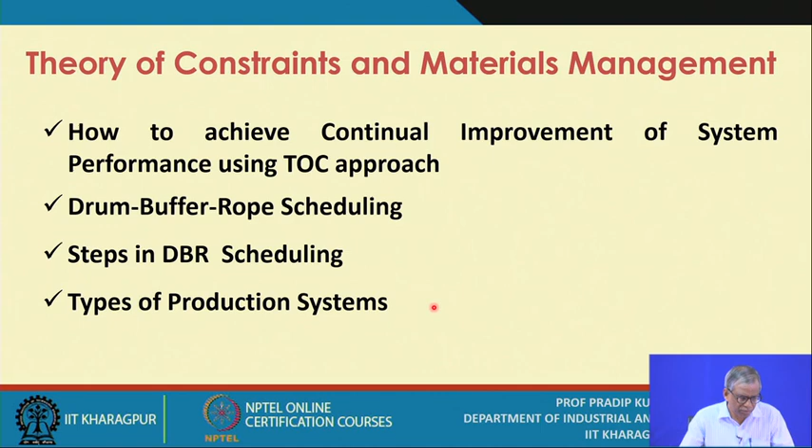And towards the end, we will be referring to different types of production systems. When you try to apply the TOC logic or TOC approach, you need to classify the production systems in a particular way. So, based on this classification approach, what are the types of production systems you come across, and for each type of production system, how do you implement and develop the TOC approach. So, all these 4 issues we are going to discuss now.

Now, the first issue is how to achieve continual improvement of system performance using the TOC approach. Here it is explained with a flow chart in a closed loop. There are several steps, and you have to follow these steps in a systematic manner, and you have to define all sorts of variables, parameters, and outputs at each of these steps involved.

The first one is identification of the constraints. Okay, so that is your first step. The starting point is, obviously, you start with the internal constraints, and many a time the internal constraints are referred to as the bottlenecks. It creates bottlenecks. So you start with identifying constraints, and the constraints are related to the resources, and based on these constraints you need to identify the capacity constraint resources. So this is the first step, and what approach you follow for identification of the constraints.

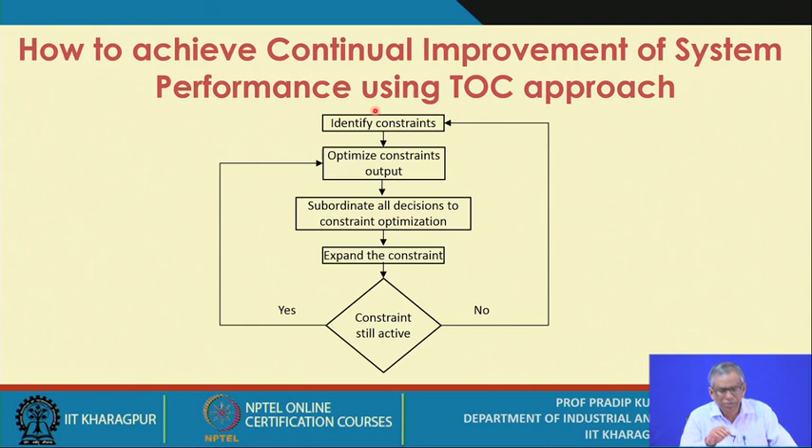So this is the flow chart, and with this approach it is expected that you will go for continual improvement of the system performance. You can set different targets at different points in time, and check whether you are achieving those targets or goals or not. So this is the general approach. In a given situation, you have to apply this generic approach to a particular case. What are those specific constraints? How many constraints have you been dealing with for the last couple of years? You will have that sort of information, and there must be specificity in your whole approach. So this is the first step you do.

Now, by this time you have come to know what the TOC approach is, and how you get optimized system performance by applying the TOC approach. It is a continual improvement philosophy, mainly applicable for repetitive manufacturing.

And what is most important is that the flow of materials within the production system or the manufacturing system should be very smooth, and you must have sufficient control on this flow. That means even if this flow of materials is disturbed, you must know what the possible reasons are, and you must be very responsive, and as quickly as possible you must be able to take the corrective measures.

So essentially it talks about scheduling, and this scheduling, the TOC based scheduling, is many a time referred to as drum buffer rope scheduling. So please note down this name, drum buffer rope scheduling, or in short DBR scheduling. For the working of the TOC approach, you already know the flow chart. If you look at this flow chart, which we have already explained, you will come to know the working of the TOC approach in specific terms.

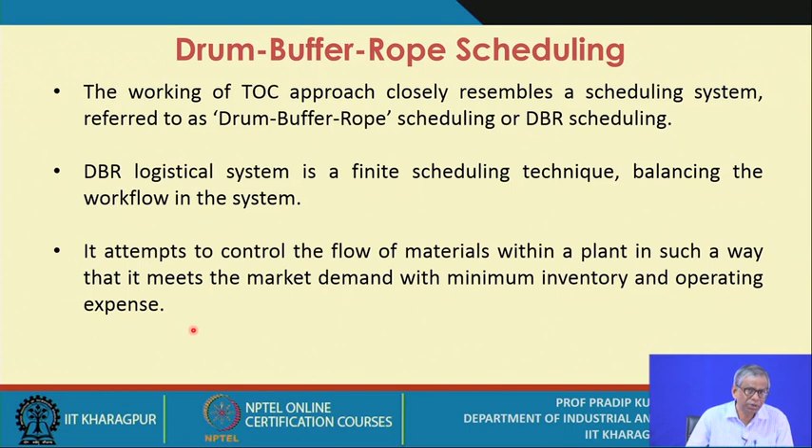It identifies all types of constraints related to three aspects: processing, resources and marketing. Marketing talks about demand generation, and that's why you must know the constraints related to marketing. Then you have been using several kinds of resources. We have already defined what a resource is. Related to a particular resource, you should be aware of what sort of constraints you are facing; we have already mentioned a few examples. And similarly, while processing a particular product or component at a particular resource, what sort of constraints you may be facing. So this list of constraints you must have with you.

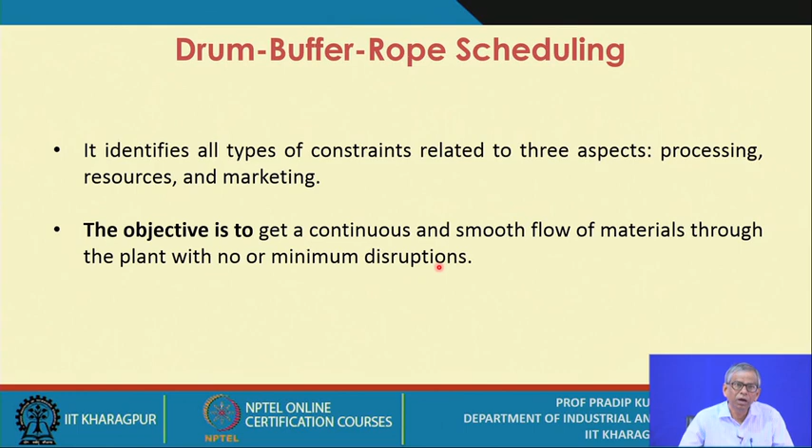So the first step in developing such a scheduling approach is to get the data related to the types of constraints at the processing stage, the resource stage, and the marketing stage. The objective is to get a continuous and smooth flow of materials through the plant with no or minimum disruptions. And even if there is a disruption, there could be certain unforeseen developments causing disturbances; if there are disruptions in the flow, as quickly as possible you must be able to identify the causes and remove them so that you get back your original system and the previous flow rate.

Now DBR scheduling is also a systematic approach. So let me tell you the steps involved. Essentially there are three interrelated steps: step 1, step 2 and step 3. Now let me tell you what you are supposed to do in each of these steps.

In step 1, you need to develop a master production schedule, or MPS, matching with the capacity constrained resources, or CCRs. We have already defined CCRs, and we have also mentioned that the entire TOC approach starts with the identification of CCRs. So this is your first exercise. Assuming that the CCRs are identified, you develop the master production schedule in such a way that the MPS matches with the CCRs.

So this is very, very important. That means your base is CCR, and based on the CCRs, the requirements, you go for developing the master production schedule. When we discussed the MRP, we mentioned the MPS, and that is one of the inputs of the MRP system you are already aware of.

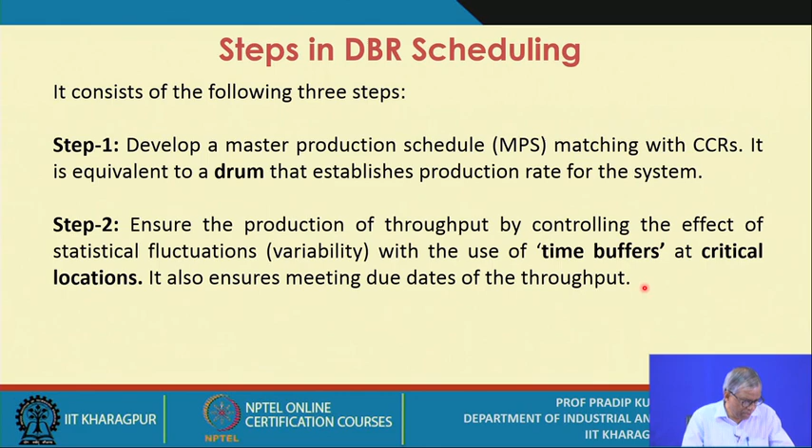So many a time you apply the priority rules for the jobs of scheduling, and in this case particularly one priority rule you must be able to satisfy, or you must use, and that priority rule is actually meeting the due dates, or expected due dates, of the throughput. Once this is done, that means at the first step the drum, at the second step creating the time buffers at the critical locations of the production system, next you move to step 3. That means when you reach step 3, the variability is under control.

You can use the time buffers to control the flow, and you are in a position to produce the throughput, and you are also in a position to meet the due dates. Is it okay? So that means once you are successful in implementing step 1 and step 2, the entire production system is more or less under your control. Then you move to step 3.

Tie the production rate for the CCRs to each resource by using time-phased logistical ropes. That means with the rope, you try to control the rotation of the drum. So this is referred to as the ropes, and the ropes synchronize all non-CCRs to help timely release of required materials with required quantity at required time into the system.

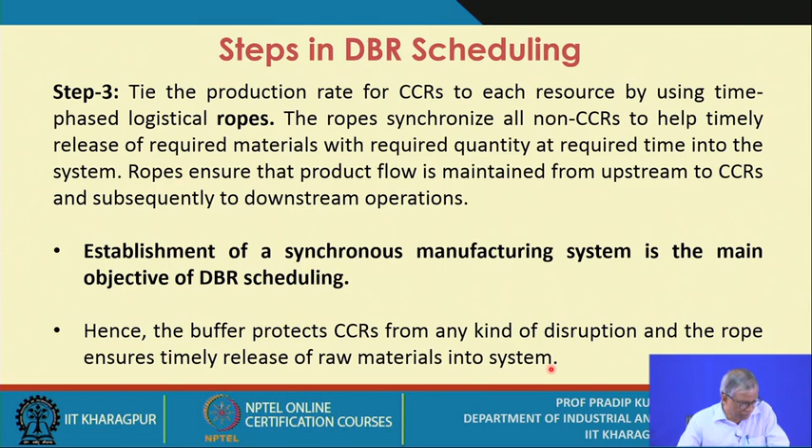Quantity is definitely one aspect, and the second most important aspect is the timing. Otherwise, the smooth flow of materials you cannot maintain. And what is important is the rope ensures timely release of raw materials into the systems. Is it okay? So this is also very, very important, both quantity and timing.

Now, in this context, identification of scheduled release points out of many possible release points in the production system is a critical issue. So, just make a note of this term, scheduled release points. When you represent a particular production system with a diagram where the interrelationships between different stages are highlighted, the first thing you need to do for application of DBR scheduling is identify the scheduled release points.

As only the scheduled release points are tightly controlled, there may not be any need for close control of other points. There may be n number of release points, but out of these, which ones are the scheduled or critical release points, you need to identify them only. There are 4 categories of scheduled release points. At this point in time, you must know how to categorize these release points.

First one is the raw materials release points. This is very, very critical, in fact. Then the CCRs; all the CCRs you need to identify, and all these CCRs are critical release points. Then the assembly points, because assembly points are very critical in the sense that you must ensure the supply of the required quantity of materials as well as the timely release of such materials to the assembly points.

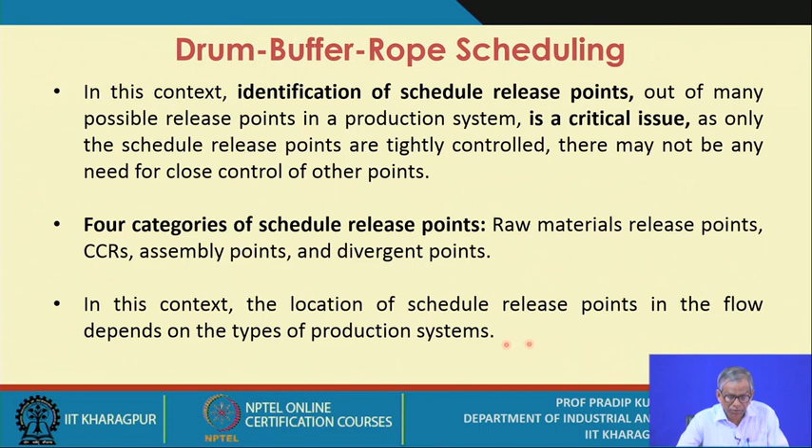So, under TOC, the production systems are grouped under 3 categories: one is the V plant, the second one is the A plant, and the third one is the T plant. As we have been pointing out, the entire production system for which you are going to implement TOC has to be represented in a particular manner. There are 3 ways you can represent a production system, and accordingly 3 types of production systems or plants we have. The first one is referred to as the V plant, the second one is referred to as the A plant, and the third one is referred to as the T plant.

Now, before I conclude this session, let me explain what is a V plant, what is an A plant, and what is a T plant. A V plant has a V-shaped or divergent process flow, and has a single or a few raw materials. That means at the starting point, the raw material stage, you use either one raw material or a few, 2 or 3 types of materials, and a wide variety of end items. As you proceed further, you come across several stages. It is a divergent flow, and that's why it is referred to as the divergent process flow or V type.

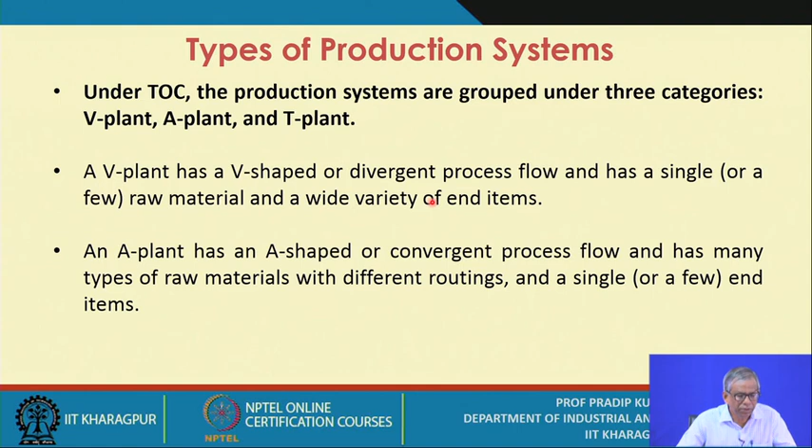Next, you may have a T plant, with a T-shaped or divergent process flow with a limited number of components or sub-assemblies that can be combined into a large number of end items. That means you have few kinds of raw materials, and when you process them in a number of stages, you have a set of components or sub-assemblies, and by combining all these components and sub-assemblies, you can have a substantial number of end items. That's why it is referred to as the T plant or the T-shaped or divergent process flow.

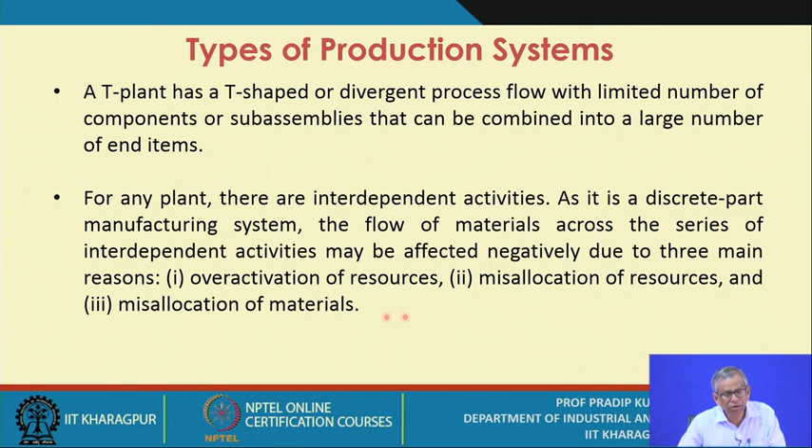For any plant, there are interdependent activities. As it is a discrete part manufacturing system, the flow of materials across the series of interdependent activities may be affected negatively due to three main reasons: overactivation of resources, that is one. Similarly, the misallocation of resources may create a lot of disturbance in the system as far as process flow is concerned. And similarly, the misallocation of materials also may adversely affect the process flow.

So with these explanations, now you have come to know what is DBR scheduling, what are the basic conditions you have to fulfill for implementing DBR scheduling at your production plant, what sort of control features you have in DBR scheduling, and with these control features, how you get conditions where the smooth flow of materials is guaranteed. And for that you need to represent your production system in a particular format, and the three specific structures we have mentioned are the V plant, A plant and T plant. So thank you.